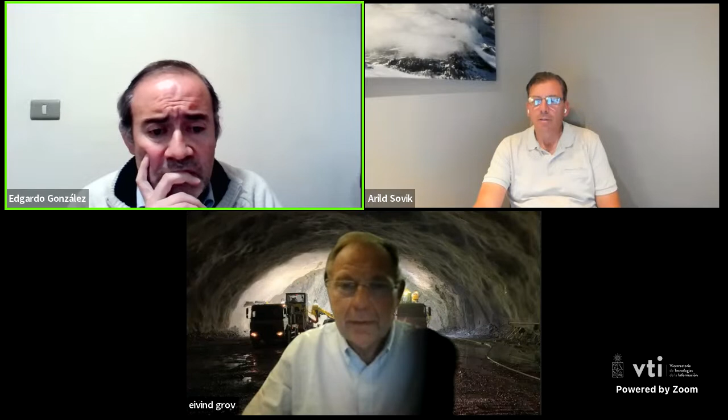How much time do we have? One hour. Okay, 45 minutes to an hour. Then maybe people will have questions and you can respond, you can answer. Okay. I think I have something like 45 slides, and that is probably a little bit too much for one hour.

First of all, I'll introduce you to two bodies that we have in Norway with respect to promoting tunneling, both domestically and internationally. First, we have the Norwegian Tunneling Network, which this presentation is made on the basis of.

It is actually a subsidiary of the Norwegian Tunneling Society, and the reason why we established this network was to engage members interested in international cooperation. We cover the entire value chain of tunnel construction and operation, including design and different types of services.

We have consultants on board, manufacturers, contractors, academia. So the entire value chain.

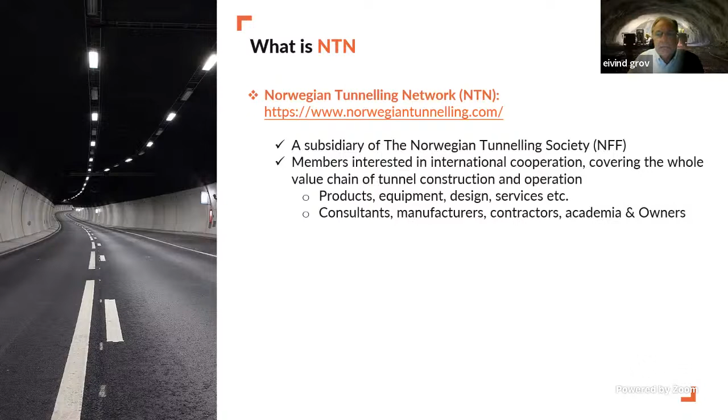The Norwegian Tunneling Society, on the other hand, is a much older organization. It was founded in 1963 and was one of those who took the initiative to establish the International Tunneling and Underground Space Association, under the short name ITA. Today it has something like 1,100 personal members and approximately 100 member organizations.

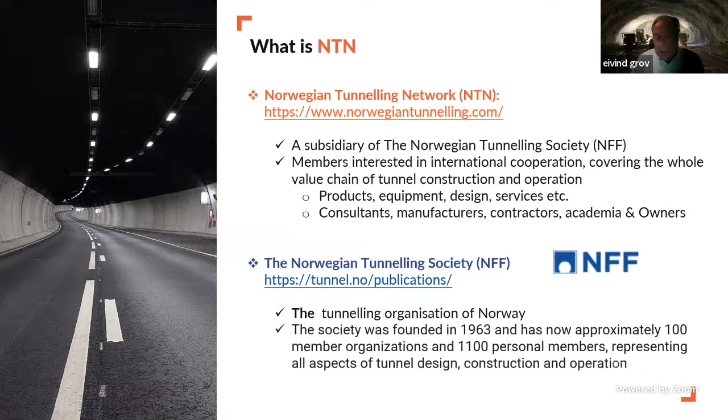This is more an organization established to drive tunneling technology forward and to distribute competence and knowledge within the organization, and also to take care of how the greater society looks at the tunneling industry.

Just a short update on the productivity of the tunneling industry in Norway. In 2022, the total output was something like 5.1 million cubic meters of solid rock. This is equivalent to approximately 68 kilometers of tunnel.

Out of this, about 3.2 kilometers was actually bored with TBM. The rest is conventional drill and blast, which is today even the most dominating excavation method in Norway. A total of 24 different contractors were employed in civil tunneling. Mining, whether above or underground, is not included in these statistics.

From the 80s and 90s, where the output was approximately 4 million in average, we had some big peaks back in 2016-17, where we reached almost 8 million cubic meters of solid rock for civil tunneling. Today we are back almost to what it used to be, but still slightly above the average.

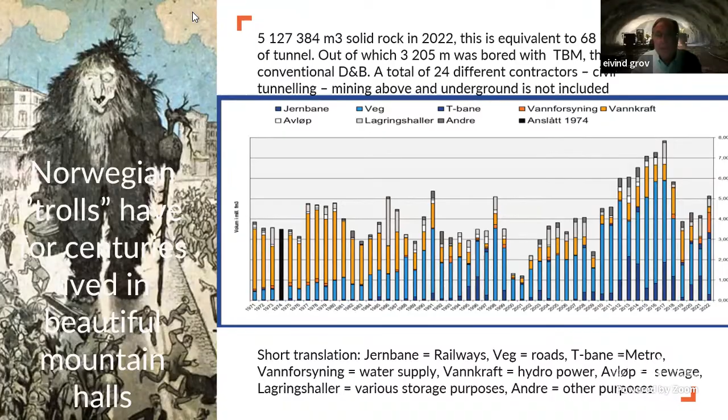Since 1884, something like almost 1,250 road tunnels have been built. We have approximately 150 being planned, and around 50 under construction at the moment. Soon we will have something like 40 subsea road tunnels in operation.

As you know, and as you will see on some maps later on, the Norwegian landmass is cut by deep fjords, which cut deep into the landscape, and this creates the need for subsea road tunnels. A big project named Rogfast, a 27-kilometer subsea road tunnel with 2 tubes, reaching down to approximately 390 meters below sea level, is actually ongoing in the construction phase.

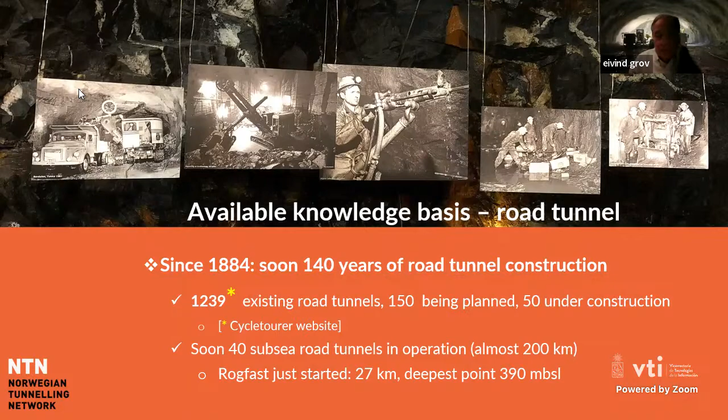When it comes to railway tunnels, the first big project was actually the Oslo-Bergen Railway, which was finished in 1909, and it consists of 182 tunnels, some short and some longer. But at that time, that was a really high achievement for the industry.

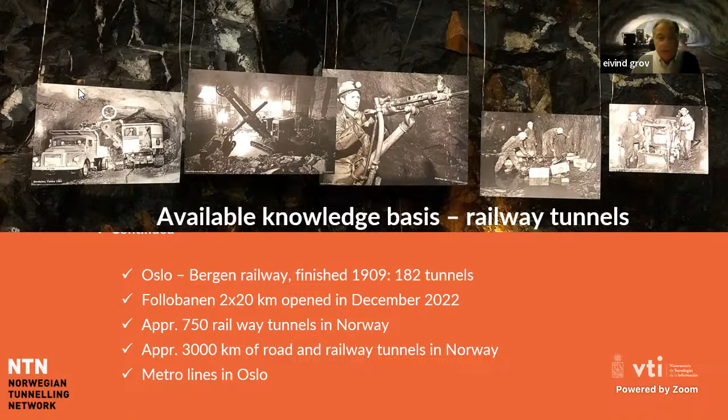The Follobanen, the latest big project within railway tunnels, was opened in December 2022, which is 2 times 20 kilometers of TBM-bored tunnels. We have something like 750 railway tunnels in Norway today in operation. Totally, when you add railway tunnels to road tunnels, the approximate length is around 3,000 kilometers. In addition, particularly in the Oslo area, we have some metro tunnels, but not that many.

If you look at caverns and tunnels in general, the hydropower era started in Norway following the Second World War. Today we have, as a guesstimate, around 5,000 kilometers of hydropower tunnels. More than 200 powerhouse caverns have been built to serve these hydropower plants.

If we look at oil and gas storage facilities, we have around 60 caverns particularly designed and made for storage of oil and gas. The number of caverns for water storage, sewage treatment, parking lots, and so on, we do not have an exact number of, but there's a big bunch of that kind of purpose.

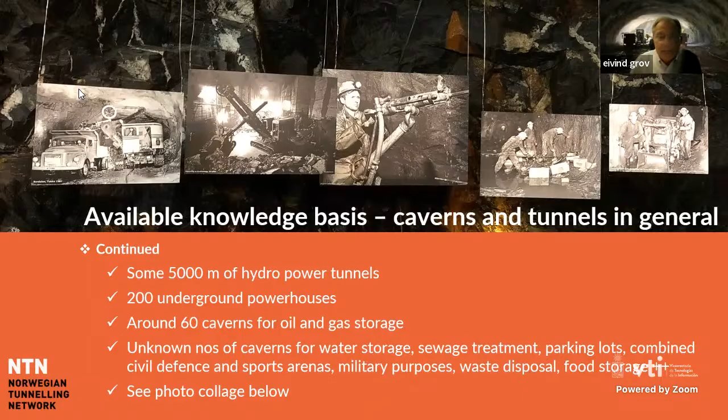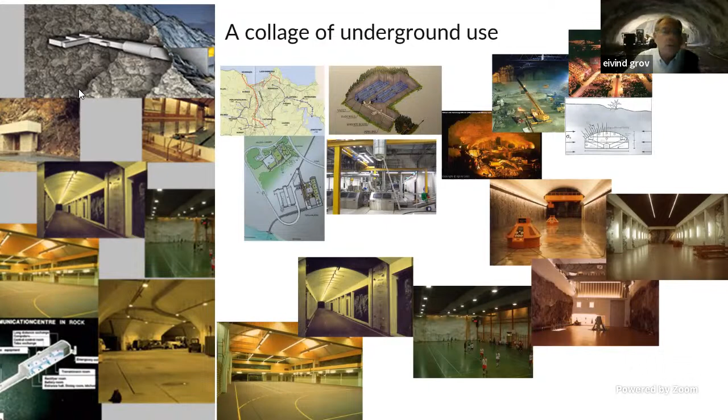I have added a photo collage below where you see some of the uses that caverns are made for. In the Cold War era, in particular, we made combined civil shelters with sports arenas, some of which you see on the left-hand side of the slide. In the middle, you see a map of Trondheim, where there are 2 large storage facilities of drinkable water. On the upper right-hand side, you see slides showing the construction of Gjøvik, and Gjøvik in operation mode, fully packed with some kind of entertainment event going on.

On the right-hand lower corner, you see some interior views of hydropower plants. In the middle lower part, you also see some combination of civil defense shelters and sports arenas. There's a good number of underground facilities for all these kinds of purposes.

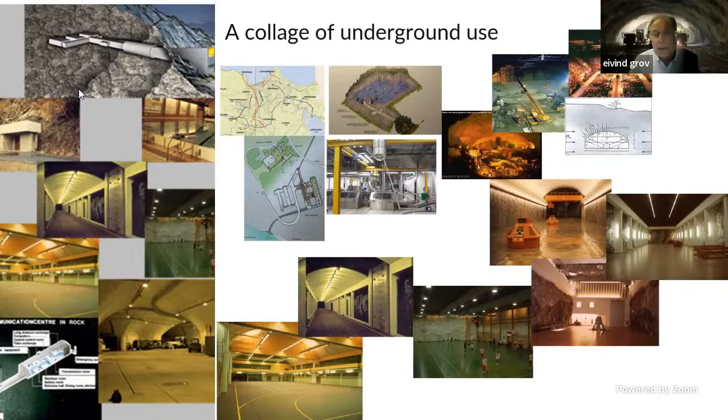The principle in all of these different tunnels and underground caverns is that the concept targets short construction time, low construction cost, and low cost of operation and maintenance. In particular, we consider the rock mass as a construction material, and we integrate this into the underground structure itself. So whatever we need to add to the rock mass in terms of support design or reinforcement, we add what is needed to produce the required factor of safety for that particular tunnel or underground space purpose.

Conflict reduction and efficiency is supported by a risk-sharing contract system and contractor incentives. We will come back to that later on.

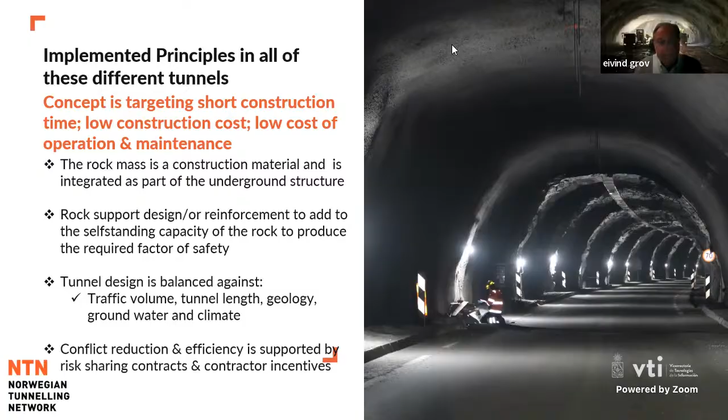We understand that tunneling in Chile is promising at the moment, both for mining and civil tunneling purposes. So the question then would be, can an approach from abroad be implemented in Chile? The first reaction is that each project, and each underground project in itself, is a unique project - unique in the terms that the ground conditions are different from place to place.

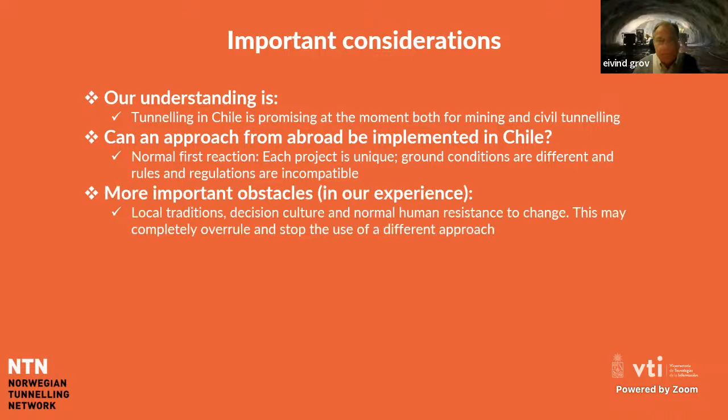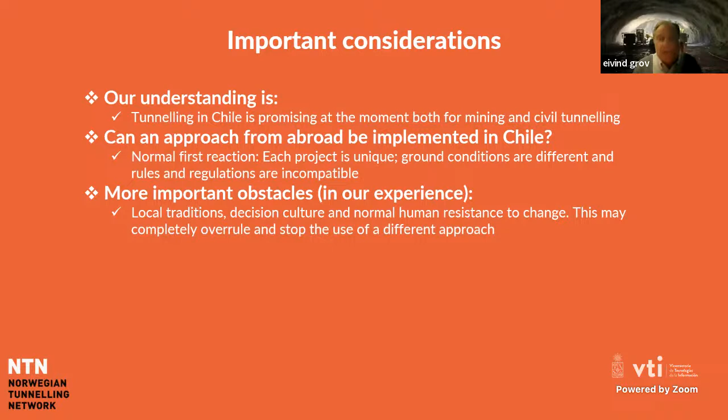And the rules and regulations may not necessarily be compatible. More important obstacles could be, from our experience, that local traditions, decision-taking cultures, and normal human resistance to change could hamper the development. And to some extent, this may completely overrule and stop the use of different approaches. That's a pity if such happens.

Common tunneling challenge everywhere in the world - no matter where we are going, being Chile or Norway or wherever - there is a frequent change of ground conditions within an often very wide range. We have to have a concept, a system which is actually capable of taking care of these frequently changing ground conditions.

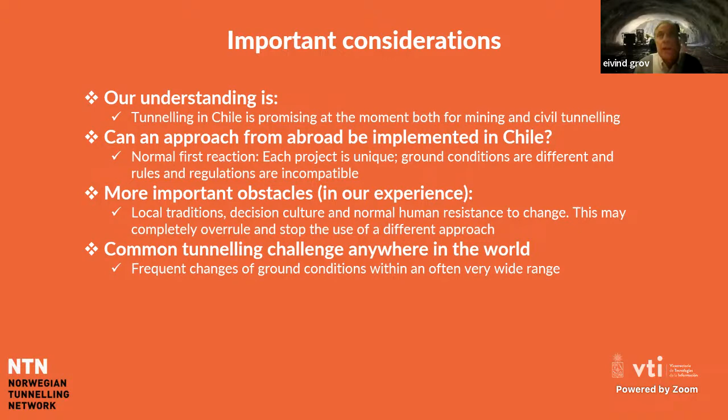So we can challenge this in two ways. We can apply what we consider as a worst case rock support for the entire tunnel - a standard rock support, no matter what kind of ground conditions we have. The other solution would be to adapt the support along the tunnel to whatever is the minimum necessary for safe tunneling and operation conditions. We sometimes call this an active design, because the design is developed as the rock mass is encountered during the excavation work. Both are possible and will work.

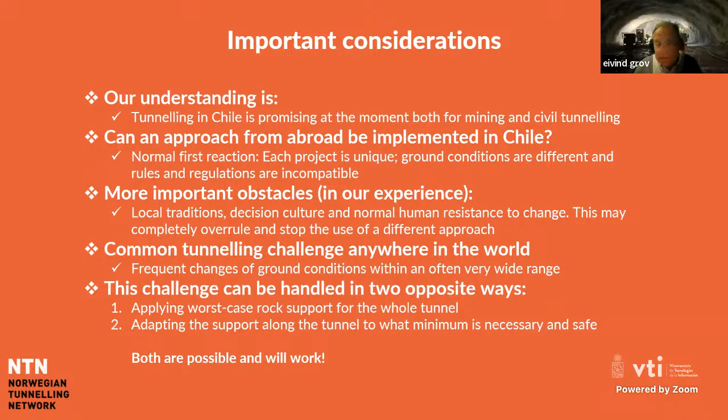However, one may experience that there could be a time and cost difference between these two approaches. We have to take, when we do this adaptive approach, the work changes into account when we implement the support, regardless of rock conditions and groundwater.

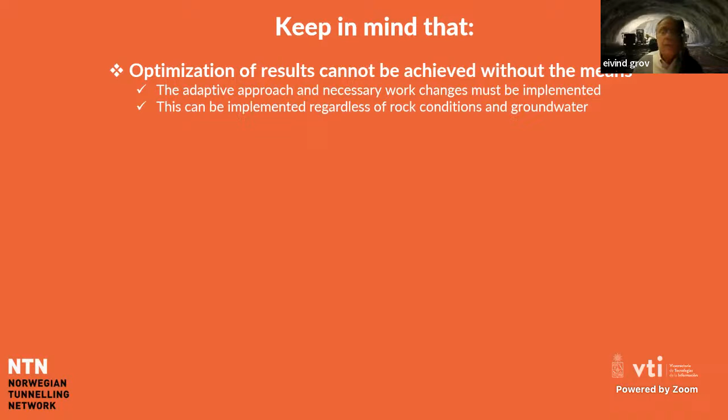What we see internationally is that there is a sort of over-conservative lining solution, which is sometimes applied without actually taking into account what is really required. Honestly, we have seen this growing in Norway as well. But I hope that the new era that is coming, which means we have to reduce emissions from the tunneling industry, will also mean that the solution with cast-in-place concrete linings or precast segments will be reduced in quantity and representation in the tunneling business.

We have seen this being successfully applied in various parts of the world, particularly in the Nordic countries, and I would point specifically to Iceland and the Faroe Islands. But we have also seen this approach being included in tunneling in Hong Kong recently.

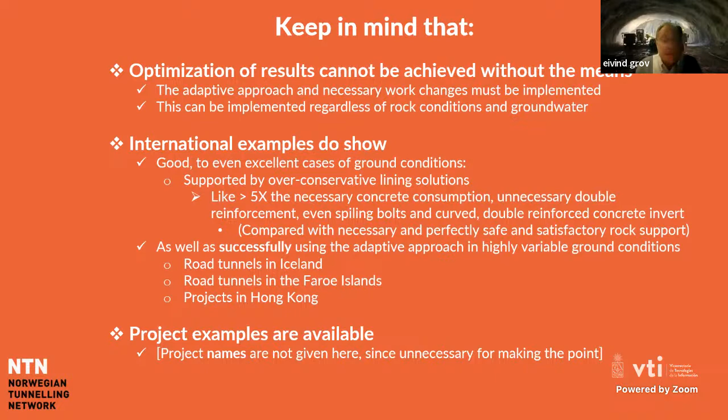Some people tend to believe that the ground condition in Norway is always very good rock mass conditions. That is definitely not the case, because as is necessary in many places around the world, we are also facing the challenge to meet changing ground conditions. The rock burden or rock cover could in many cases reach as much as 1,500 meters, which means we also have to face rock burst and squeezing. But at the same time, destressed areas can also be faced, particularly at shallow depth.

We have had tunnels in Norway with a groundwater head of 1,000 meters, that is 100 bars, which is really something to fight with when you have excessive leakage and you need to grout it by pre-excavation grouting.

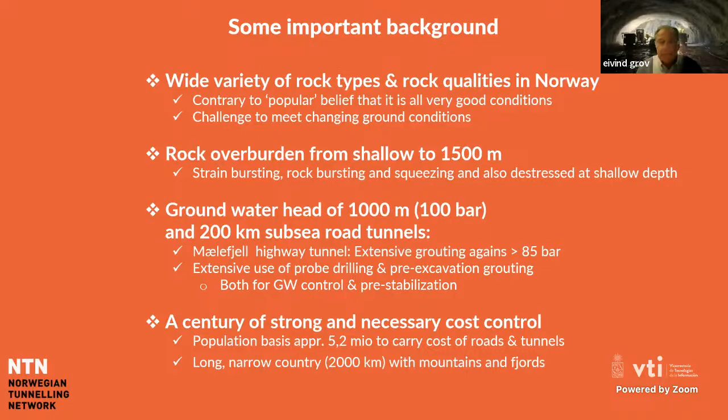If we look at some moon landings in tunneling in Norway, I would say the high performance TBMs that were developed in the 80s, made particularly for hard rock tunneling with up to 32 tons per cutter and 17 to 19 inch cutters, was something developed to satisfy Norwegian owners.

We have headrace tunnels in Norway for hydropower development with more than 1,000 meters water pressure. I think the largest was Nye Tyin, which was put into operation some 10-15 years ago, where the water pressure was slightly above 1,000 - I think it was 1,040 meters.

We have tunnel piercing, which is a kind of specialty that originally came from hydropower development, but has been used recently also for landfall tunnels in the oil and gas business. And the highest water depth was actually 175 meters for the landfall tunnel for Troll.

We have chilled or cold storage facilities for LPG at down to minus 42 degrees Celsius. We aim at, or the idea now is to try to look at hydrogen, ammonia, CO2, to mention some, where we have to go even further, either in temperature or in pressure.

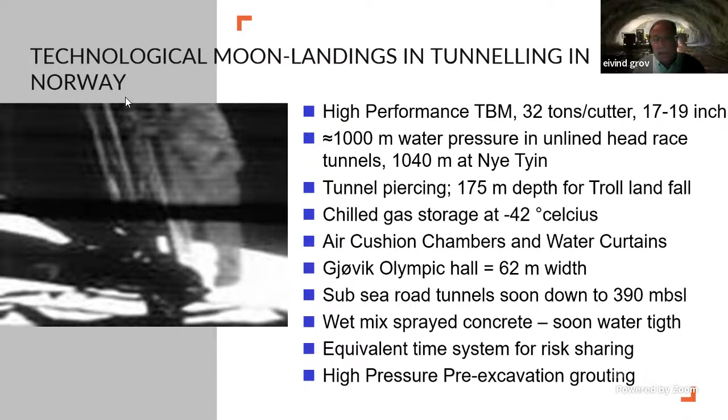As you can see on the pictures, there are lots of reasons in Norway for underground facilities. The coastal line is something like 100,000 kilometers long, with deep fjords cutting into the landscape. We have snow avalanches, rock falls, and a lot of natural things taking place in these fjords.

And going underground, not only because you need it for transport of goods and people, but also due to the fact that in the future there will be more focus on out of sight, out of mind, or not in my backyard. There are lots of surface facilities that successfully can be put underground. And underground, everything is protected from earthquakes, from tsunamis, and from terror and sabotage and unfriendly actions, which we see in the global societies these days.

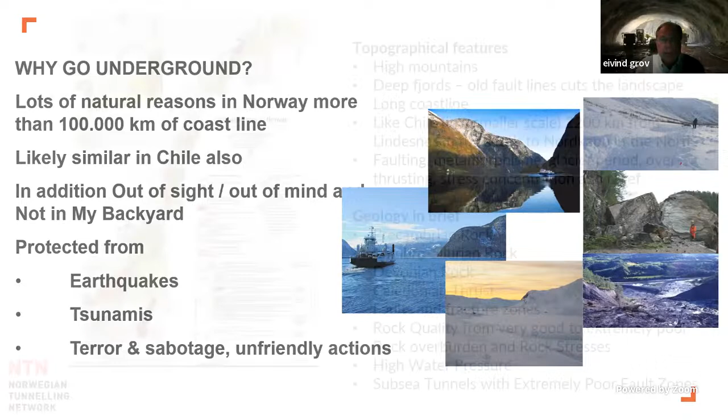If we look at the geological map of Norway, on the left-hand side of the screen, as I said, high mountains, deep fjords, and these fjords are typically fault lines which are cutting the landscape. Long coastline, probably like you have in Chile to some extent, but maybe slightly smaller scale.

This landmass has been subject to faulting, metamorphism, glacier periods, overtrusting, stress concentration, and stress reliefs. So it's a landscape which has not been treated very well by the natural environment it has been a part of. We have Precambrian rocks at the west coast of Norway and in the southern part. We have Cambro-Silurian rock, particularly in the Oslo area. And we have the Caledonian thrust system, which is actually cutting through the landscape from the west coast up through Trøndelag, Nordland, and to the far north.

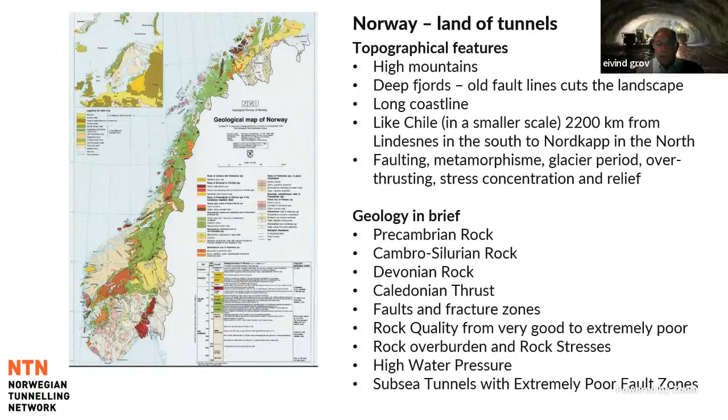So the main philosophy in Norwegian tunneling is, as I said, that rock is a part of the construction material. We have a very systematic approach using, to some extent, risk and opportunity assessment. The fact that we are able, in the tunneling industry, to identify the challenges and risks that we foresee when tunneling a certain section is important. It's important because then we can do the measures needed upfront to reduce the risk, instead of just dumping right into it.

Over the last years, life cycle cost assessment has become a method that is used, particularly when we look at different solutions for water and frost protection, for example, but also on the major part of installations in railway and road tunnels.

With what we see, the UN goals, there has to be a cut or reduction in the CO2 emission from the tunneling industry. And by putting the environmental effects in focus, for good and for bad, that would need to be a source to promote innovation in the tunneling industry. The supercon, which I mentioned earlier, the watertight sprayed concrete, is one of the things we are looking at to be able to reduce emissions and be a better caretaker of the environmental impacts that tunneling is actually causing.

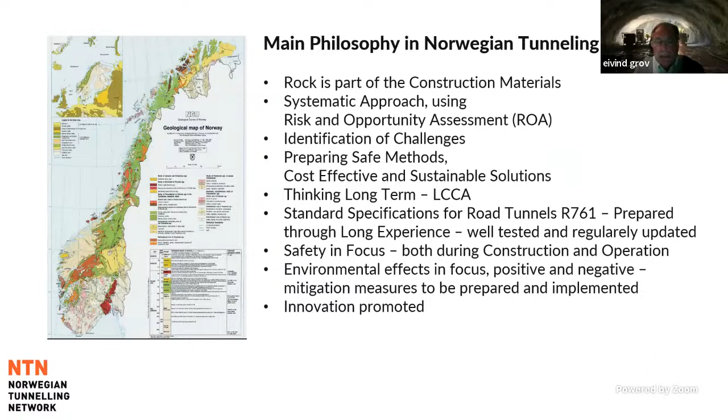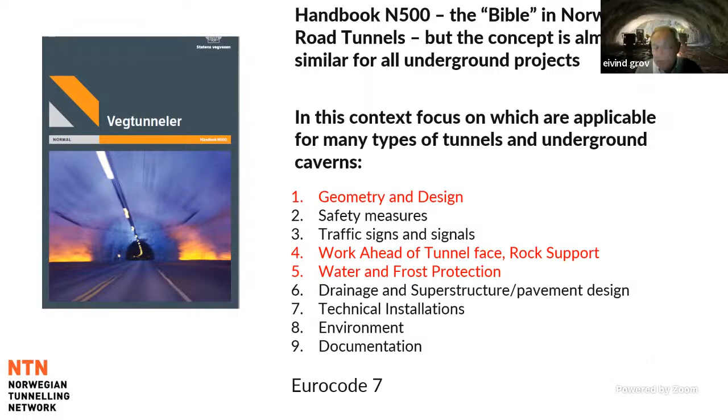During the planning stage, in Norway at least, and I would guess this is not very particular for Norway, we always start with a desktop study for a project, collecting available existing information from neighboring tunnels and caverns or other projects we've been involved in, and so on.

A geological surface mapping is always mandatory, coupled with aerial photos, because in the Norwegian landscape, eroded by glaciers, we can easily see structures because weakness zones have been eroded whilst fresh rock stands up. So it's quite easy to see where we have fault zones and weakness zones.

It follows with site investigation and sampling. In many cases, stress measurements are vital information sought to be able to put the cavern or tunnel in the right place and secure it for stress regimes. But it's also a guideline for how we could actually execute pre-excavation grouting.

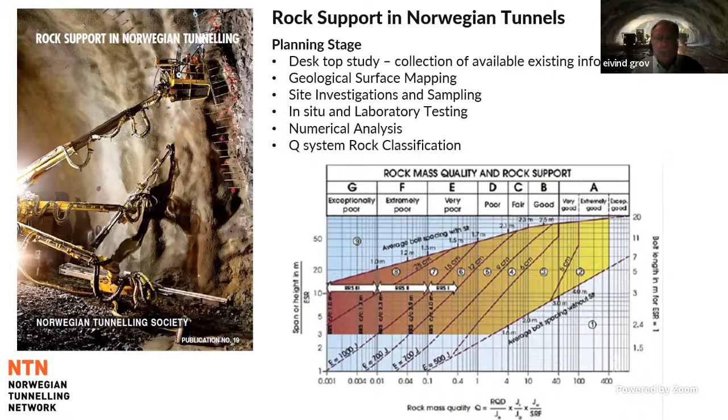In Norway, three-dimensional BIM has become more and more a must in tunneling works. We can take the investigation and test results and implement those into the three-dimensional model, and we'll be able to see orientation of weakness zones, dip of weakness zones, and so on, and model our tunnel accordingly if we have the flexibility. That's important.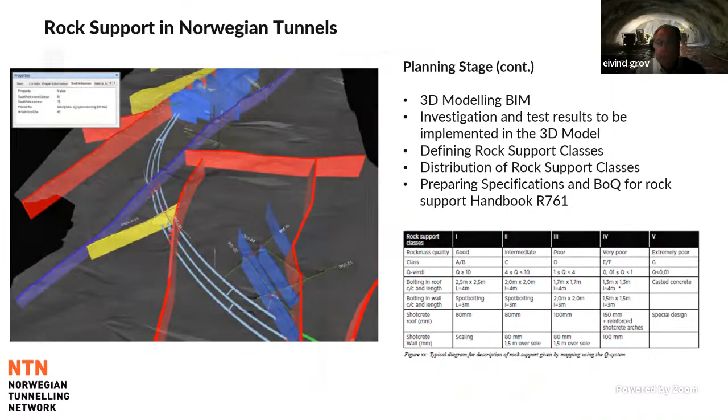When it comes to the construction site, during the planning stage we cannot pre-investigate to such a level that there is no more risk left. That's not a viable situation - it would be too costly, too lengthy, and you may not have full benefit of all this information at the end of the day. Thus there must be some risk we can handle during construction, and some of the means and methods available for that is probe drilling ahead of the tunnel face.

We can do it with the equipment at the tunnel boring machine itself, or as core drilling, but that's a little too long-lasting compared to the capacity you can use from the drilling rig. Mandatory in some Norwegian tunnels today is to use measurement while drilling, so all holes drilled - blast holes, core holes, probe drilling holes - are measured with measurement while drilling equipment.

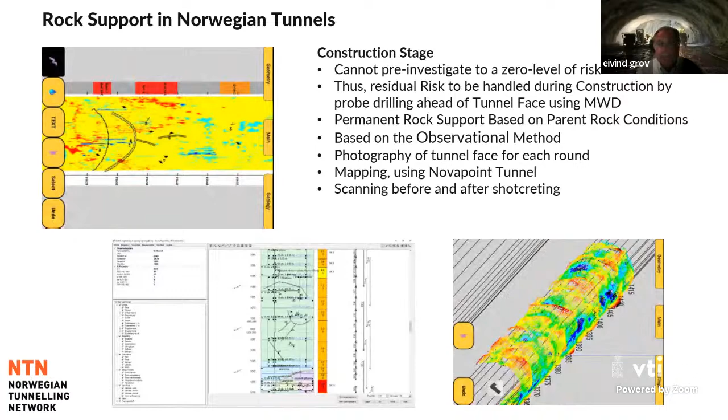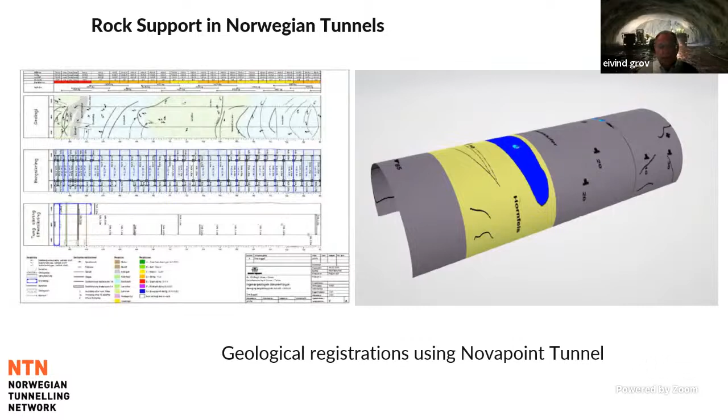One of the main tools that we have is probe drilling ahead of the tunnel face to obtain information of the rock mass ahead of the face, using measurement while drilling technology. But we have also seen new technologies like TPS, rock mass tomography, acoustic sounding, and similar measures, which are useful when we expect extreme poor ground conditions ahead of the face.

Grouting, or pre-excavation grouting, is a must in Norway. We always have pre-excavation grouting as the first line of defense when it comes to dealing with water. And if we need something more than what we could gain from rock bolts and sprayed concrete, spiling bolts will be the first to come, then reinforced ribs of sprayed concrete, and pipe umbrellas if there are extreme poor ground conditions. We try as best as we can to avoid cast-in-place concrete linings in Norway.

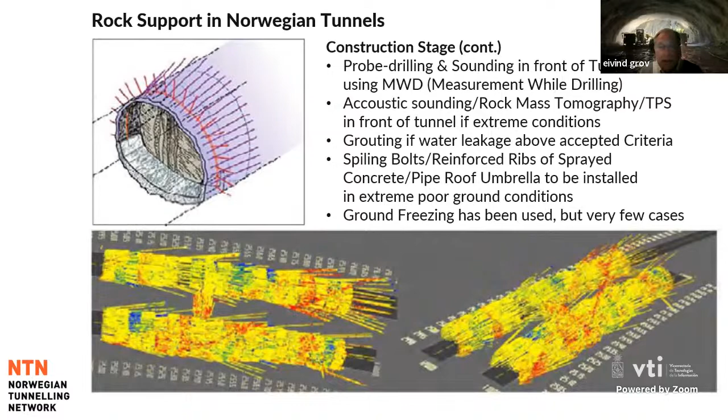It's important that we compare what we gain from the pre-investigation results and the measurement while drilling. It may not be so that they are identical, but I think the most important thing is the precaution and the heads-up on potential zones for decision making, so that we are able to make decisions in good time before we enter into something of poor quality.

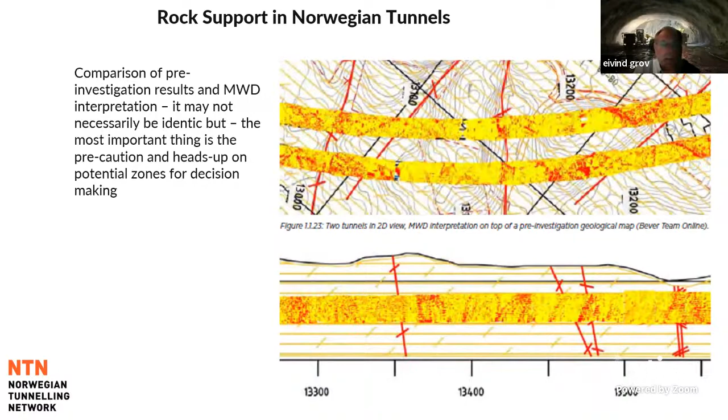On the left-hand side there's a picture of ribs of reinforced sprayed concrete. In the middle, it's a picture of pipe umbrellas, and on the right-hand side you see three pictures on top of each other. This is from the Oslofjord tunnel, a subsea road tunnel excavated back in the late 90s, showing what they encountered going on a descent.

On the upper picture, they came from the left-hand side, went down towards the right-hand side, and you can see they encountered a weakness zone. This weakness zone was actually detected during probe drilling ahead of the tunnel face, and it was of extremely poor quality. So they stopped the excavation and decided to make a bypass on a lower level, which you can see in the picture in the middle.

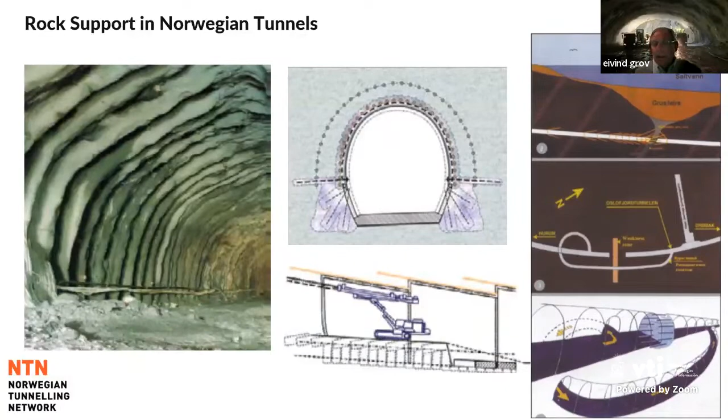They used the freezing technique to stabilize the weak fault zone, and after freezing, they concreted the whole thing. Finally, when this was completed, they opened the tunnel in this area and used the bypass tunnel they had for other purposes. So this was really a textbook example of how to react and what to do when probe drilling ahead of the tunnel face shows something of very poor quality.

As I said, water control in Norwegian tunnels follows the basic philosophy of pre-excavation grouting as the first line of defense. This is due to the fact that in many cases we have experienced water leakage that comes through the rock and enters the tunnel, causing a dewatering of groundwater.

What we have today is a tool to decide the maximum allowable inflow level to a tunnel, based on calculations and modeling of what is on the surface with respect to constructions, or flora and fauna at the surface. How sensitive are these different things with respect to a lowered groundwater level? From this, we get the maximum allowable inflow level in the tunnel, and this level is decisive for the grouting effort we use.

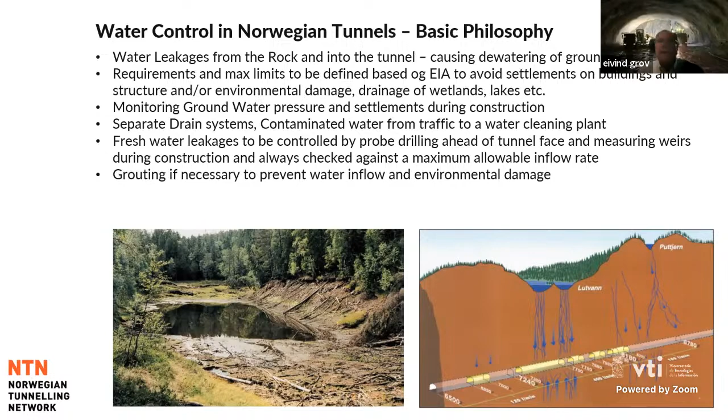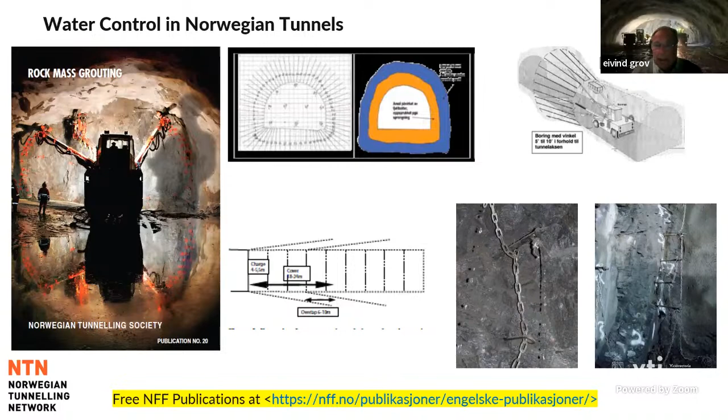The Norwegian Tunneling Society has presented to the International Tunneling Society through ITA a number of publications, and one of them is named Rock Mass Grouting. It holds a good deal of information for the tunneling business with respect to water control by pre-excavation grouting. I don't think I'll go any further into the details on this.

Water and frost protection. In a country like Norway, where we have nice and warm summers, we also have nice and cold winters. In the case of winter, in many tunnels we have to install frost protection systems. Therefore, we call it a water and frost protection system.

In principle, all inflow water that is within the allowable level will be collected through a drain system, between the water and frost protection system and the rock mass itself. It will be drained to the surface, either by gravity or by pumps.

Then we have a number of solutions to actually install these water and frost protection systems. They could be membrane types, PE foam, which is an insulation material that needs to be fire protected, or shotcrete and sprayed membrane. And of course also the heavier stuff, like concrete elements and membrane and concrete lining. But if we concentrate on the first four bullet points, I think that would be a great benefit.

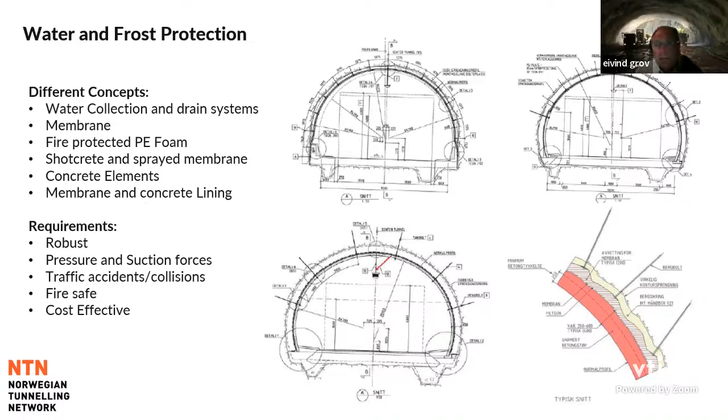So this is a nice picture of a tunnel with a new type of water and frost protection system, which, as you see, does not necessarily need to have a sprayed concrete fire protection system on top.

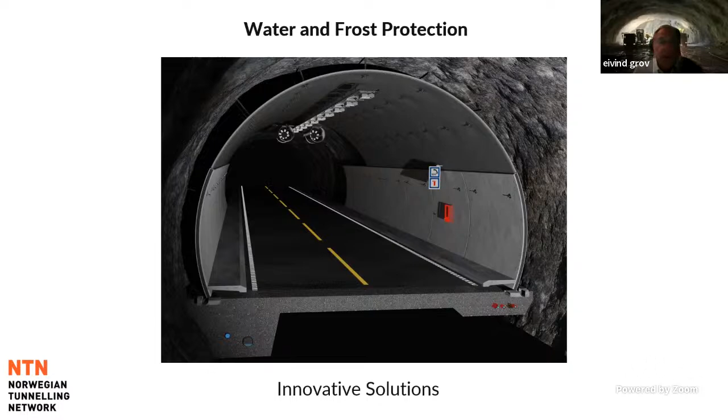So some words about risk sharing. I've said it already a number of times, that tunneling is inevitably associated with handling of uncertainties and risk. The risk is logically associated with geological conditions, and the risk can be significant.

We have seen a number of occasions in Norway and elsewhere around the world on projects which have had cost overruns and time overruns. A number of claims which have gone to court are based on unexpected geological conditions. This is way too often claimed to be the case.

Since each and every underground project is unique - surroundings, geology, owners, and so on and so forth, as we talked about earlier - the risk in each tunnel project is also unique. And therefore, the contracts that we are establishing must be unique and fit for purpose for that particular project which it is designed for.

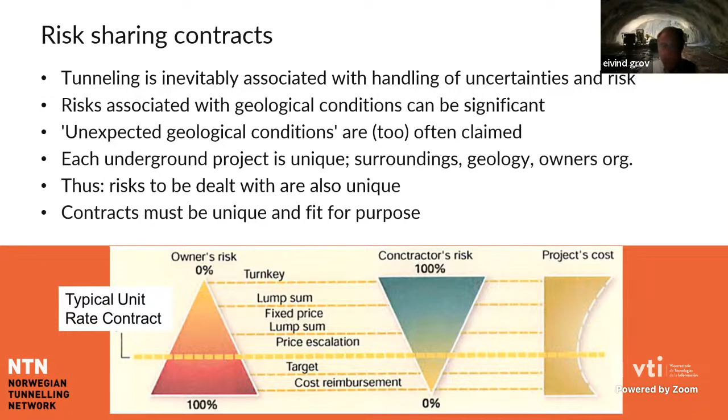When it comes to this risk-sharing principle that we have in Norway, we normally say that the ground conditions belong to the owner's part of the risk picture. The owner is responsible for the ground conditions, the owner provides the ground, and the owner is responsible for site investigation. Consequently, this should belong to his risk portion for the construction of the site also.

On the other hand, the performance is the contractor's risk. The contractor is responsible for efficient execution of the works, executed according to technical specification. In Norway, with this unit rate contract format, the contractor is reimbursed according to tendered unit rates for work actually completed. And then we have a tool at hand to adjust the construction time based on standard capacities and the number of units that are in the contract.

So the contract documents must reflect the best estimate and judgment of the ground conditions at the time the assessment is actually done.

The contract itself is just a mitigation tool, and it has to have relevant regulations so that we are able to deal with the actual situations on site. And we will see that in a few slides.

We have already stated that it's not viable to investigate to such a level that all risk is ruled out. But we are able to reduce the risk to an acceptable level. An acceptable level is also something which is not straightforward, because different persons, different companies may have a different opinion on what is acceptable level.

What the contract has to do is to have a fair and appropriate risk sharing between the owner and the contractor. We have too often seen that the contract documents, when out for tender, may not necessarily give the contractor the possibility to price the risk sufficiently. And way too many contractors jump on this without taking good notice of it. Then, of course, the contractor is in big trouble if things go wrong.

The risk that we have for a project needs to be identified and managed within an acceptable level for all parties in the project.

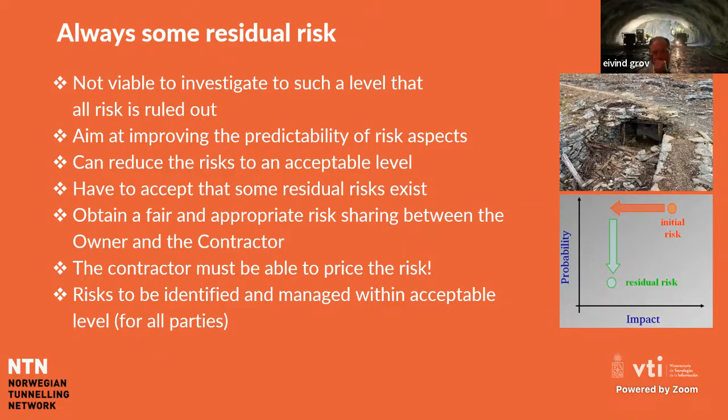As said already many times, we have changed conditions in a tunneling project. That's almost inevitable. But we can differentiate between what is foreseen and expected, what is foreseen and unexpected, and what is totally unforeseen.

When we have a situation which is foreseen and expected, the risk-sharing principle ideally eliminates most discussions about changed ground conditions. Then it only becomes a calculation on the number of items used in the project, the payment, and the construction time that follows. It's kind of a balance sheet for cost and for time.

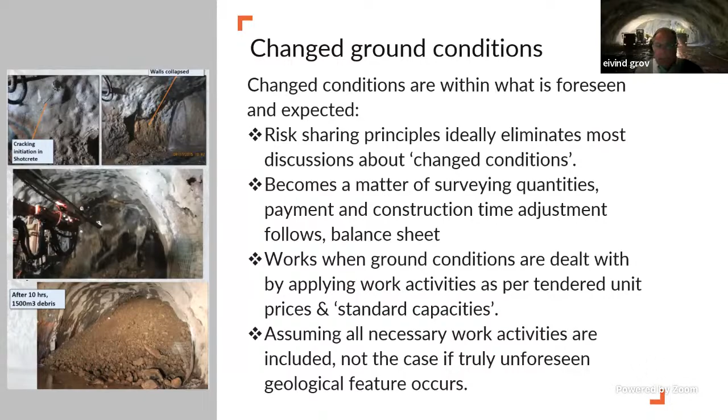If there are foreseen but unexpected conditions, the important thing is that the contract includes contingencies and clauses that could together hold a solution. It may not be as easy as when it's foreseen and expected, but the contract must have conditions and clauses to find a solution for the situation.

On the other hand, if truly unforeseen conditions occur, unit rate contracts may not provide a magical solution, and that will not be done by a fixed price contract either. The success of such a situation depends on the ability and willingness at the site between the contractor and the owner to solve the problem, both technically and contractually and cost-wise.

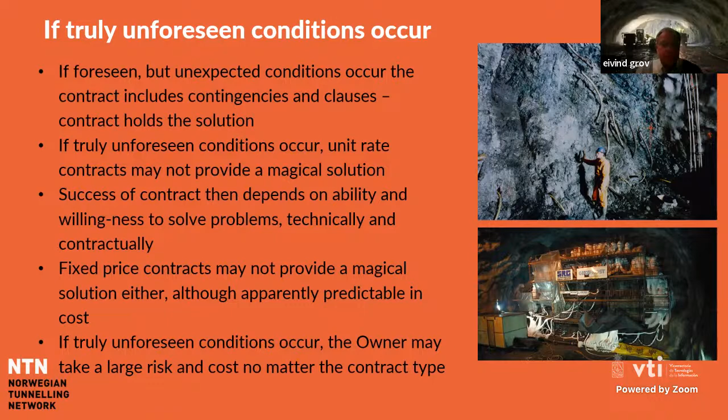In the case of a truly unforeseen situation, the owner sits with the majority of the risk, because it could lead to a bankruptcy of the contractor, and then the owner just has an unfinished product left.

It is important that at the site we have representatives for the owner and for the contractors who have authority to take decisions, decisions which have significant influence on the cost and the time, both technically and contractually. And it's important that we respect each other's tasks.

When it comes to one-time owners, they may have a totally different perspective on risks in tunneling, because they may have one project that they would like to tunnel, and then the situation is different from a multiple tunneling owner.

There is a need that at the tunnel phase, when the contractor and the owner meet and are doing decision taking on rock support, on permanent rock support or reinforcement, on pre-excavation grouting, on additional investigations to be done, and similar things.

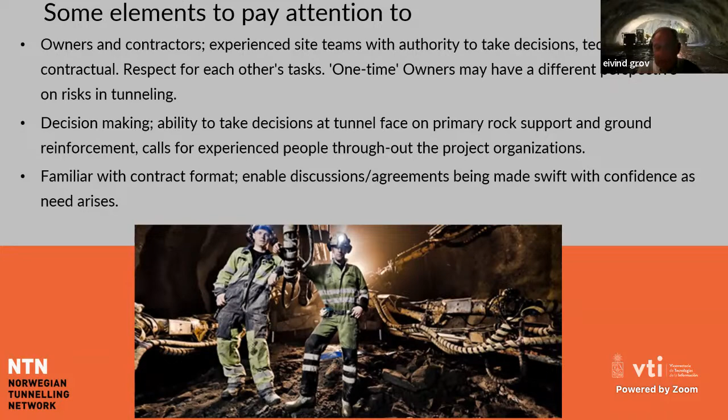The equivalent time principle is something particular. What it actually does is convert quantity, like quantity of rock bolts or sprayed concrete or this or that, into a common unit, which is number of hours. So pieces and cubic and square meters and so on and so forth becomes hours.

Each item for those activities which is actually hampering or delaying the tunnel advance has a standard time estimate for the performance of one unit.

Concrete lining, 0.1 meter per hour, and so on and so forth. These capacities are used in a balance sheet to find the difference between what was in the contract, the numbers or units in the contract, and the actual numbers or units which have been produced. Then there is a difference up or down, and the contractor is entitled to a duration of extension if it goes beyond, let's say, 1 to 2 weeks per year of construction time. So this is a way to use the production to extend or shorten, if that is the case, the construction time.

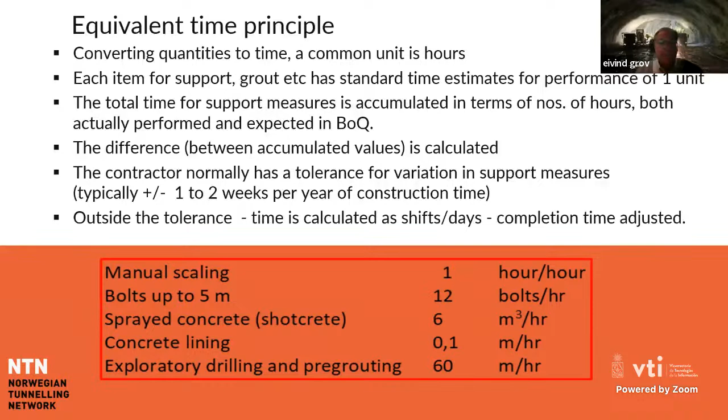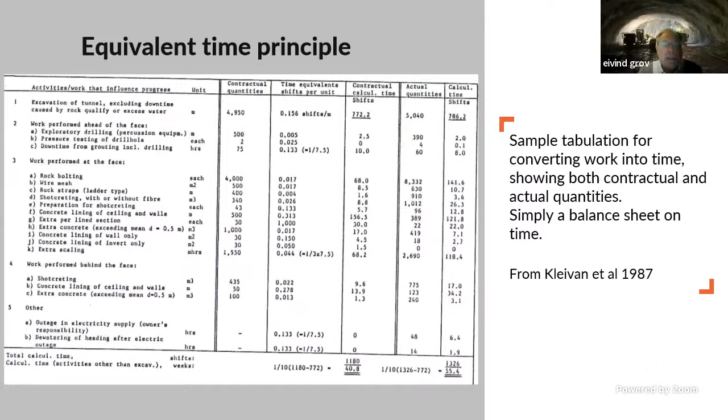This is just a sample tabulation showing how this whole thing is put together. I don't think I need to go through it, but you see all the activities on the left-hand side, the contractual quantities, the time equivalents in shifts per unit. At that time, this was a slightly different build-up: contractual calculated time, actual quantities, calculated time for the actual quantities. It comes to a difference, which is up or down, and it could lead to a time extension or a reduction of construction time, if that is the case.

What we have seen is that in many cases, even a typical straightforward unit rate contract may not necessarily be the best for a project. What we have been looking at for some projects is what we call modified, hybrid, or adjustable fixed price contracts, meaning a certain part of the contract can be a fixed price contract. Typically those items best known by the contractor compared to what an owner could know are the risk taken by the contractor, whilst elements related to typical geological conditions should be the risk of the owners. The Emerald book that came out recently has, to some extent, this kind of hybrid contract format, which is very interesting for the future.

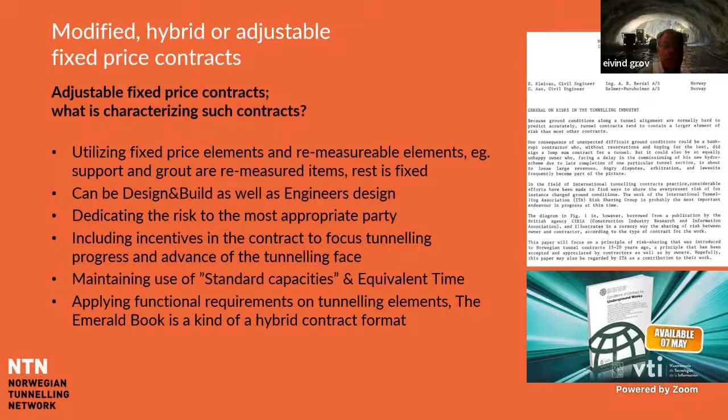When it comes to ground investigations as an important part of our tunneling project, as we have said, you cannot investigate to such a level that all risk is ruled out. There has to be some residual risk. But conducting dedicated investigations means that every single investigation measure shall have its particular purpose, meaning that if you decide to do something, you should strongly defend why you actually have to do this type of investigation at that particular point. Because most of it involves indirect methods, you have to understand the geological features from a tunneling perspective to get some benefit from this information.

As mentioned earlier, probe drilling has been acknowledged as an investigation method in Norwegian tunneling. This means that since we cannot properly do pre-investigation, we leave it to probe drilling ahead of the tunnel face to give us more information while we are doing the tunneling works itself.

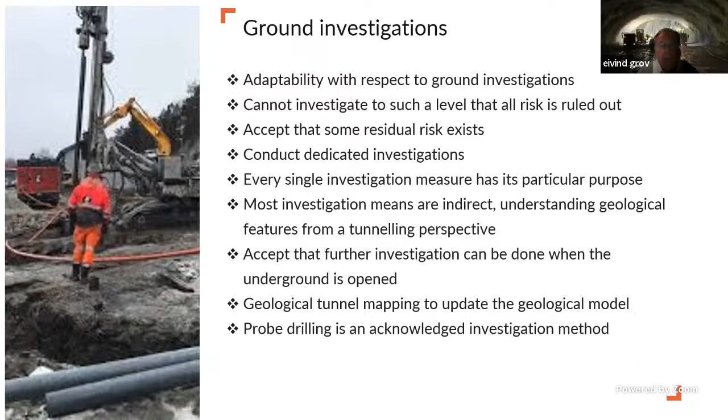Active design, I touched on active or adaptive design at the very beginning of my presentation. It's related first of all to groundwater control. Probe drilling ahead of the face is key, and we are always leaning on pre-excavation grouting. What we have seen is that to some extent we are able to document that we reach down to 2 liters per minute per 100 meter tunnel in residual inflow, which means it is dust dry in fact.

In some cases we are able to improve the permeability by a power of 2, in meters per second. Cautious blasting aims at reducing the cracking, the secondary cracking. To some extent, I think research has not been done properly with respect to the interface between the secondary cracking area, how deep it is, and the consequences on support and on water inflow, for example. There is a lot to gain by cautious blasting to produce a smooth and even surface with as little secondary cracking as possible.

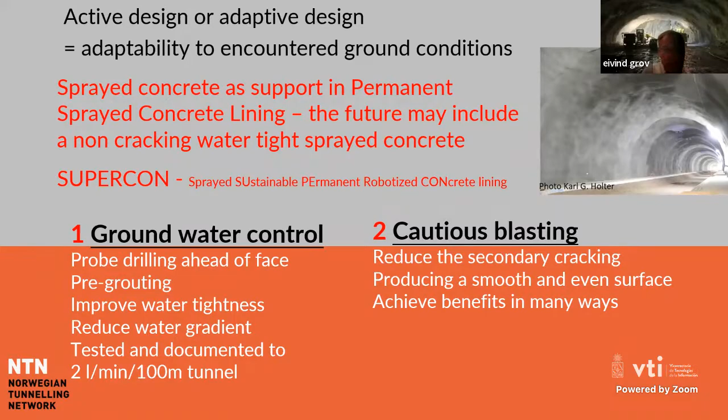We use empirical guidelines combined with analytical and numerical modeling. The Q system and RMR, for example, are typically included in the tunneling design, and when needed we also take into account numerical modeling. I mentioned the tripod earlier — that is a typical example of how we combine different types of investigations.

Observations and monitoring — many believe monitoring belongs to NATM, but over the last years we see that this is becoming more and more important also in hard rock tunneling, so that we monitor what is actually taking place over time and not just look at what was instantly happening when we blasted the tunnel face.

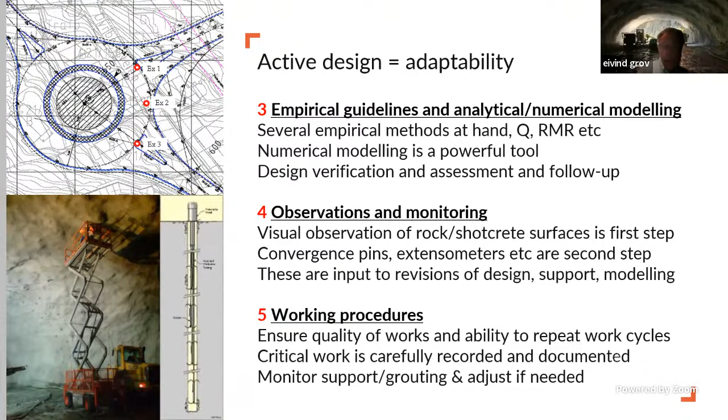One thing to keep in mind is that drain structures mean we do not need to make a watertight tunnel. We have to adapt the water inflow to what is actually on the surface, to the groundwater level, and not disturb the groundwater level, but not necessarily make it a yellow submarine in the rock mass, because that is in many cases not necessary.

Drain structure means that we are also controlling and handling the discharge of water.

Primary support approved as permanent support is something of interest, where there are significant savings, because in some places primary support is done using means and tools that do not fulfill the technical specifications for permanent support, which means you have to ignore what you have done and supplement it with a full permanent support installation. If we use primary support that actually fulfills the technical specifications for permanent works, then we include that into the total permanent support works for the tunnel itself.

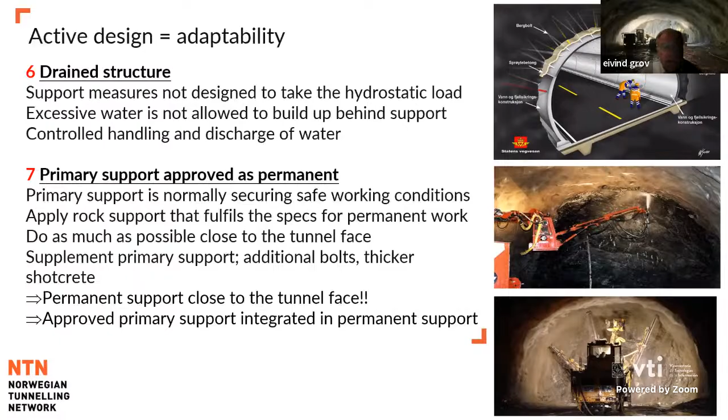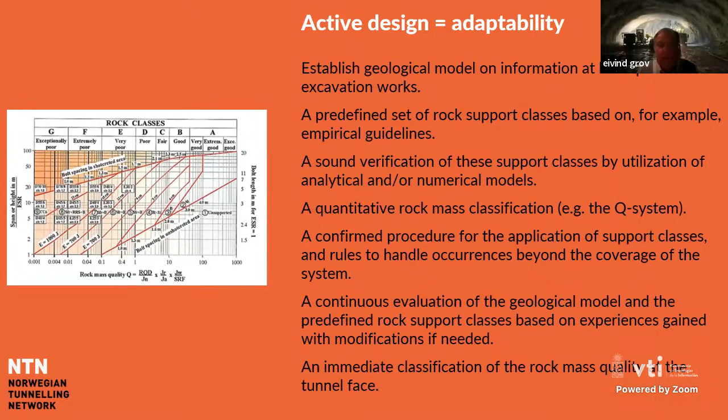These I think we have been touching on already.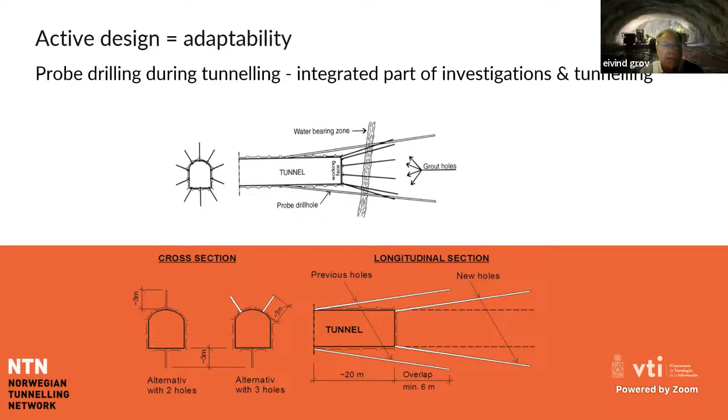In many countries there are lots of people at the tunnel face and maybe old equipment, because labor is cheap and equipment is expensive. In the Scandinavian countries, labor is expensive and equipment is cheap, so we have high capacity, state-of-the-art equipment along the whole line needed, with multi-skilled workmen at the tunnel face enabling high utilization of this equipment, and on-site decision taking.

This is not limited to drill and blast, not by any means. TBM application is also part of the concept, as something like 300 kilometers of TBM tunnels have been constructed in Norway over the years.

We see that more and more data is being recorded, not only for grouting, but for all sorts of activities. From a drilling jumbo, a grouting jumbo, a sprayed concrete jumbo, there is a large amount of information coming out, which could be used in later machine learning and artificial intelligence for the tunneling industry. This is moving slowly in the right direction now.

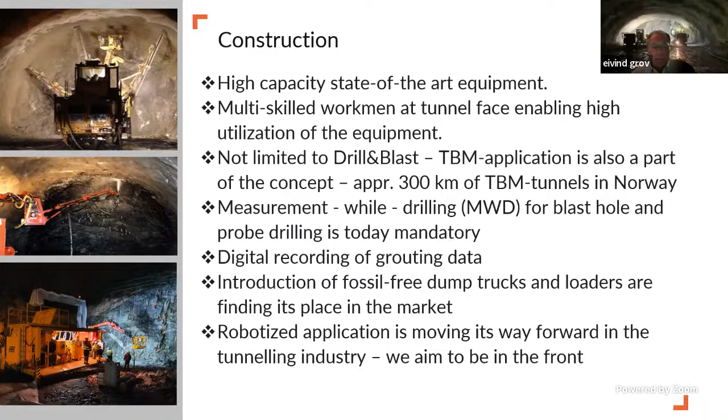In a broad perspective, there are probably more common interests at the construction site than interests of conflict. This is not typically what we see, but I think this is basically the case. We have to respect each other, and respect the different roles we have, since tunneling is a complex process. Constructive cooperation between all the representatives of the involved parties is actually needed at all times in the project. We should be much better at solving conflicts at the construction site by discussing and negotiating, and try to avoid ending up in court.

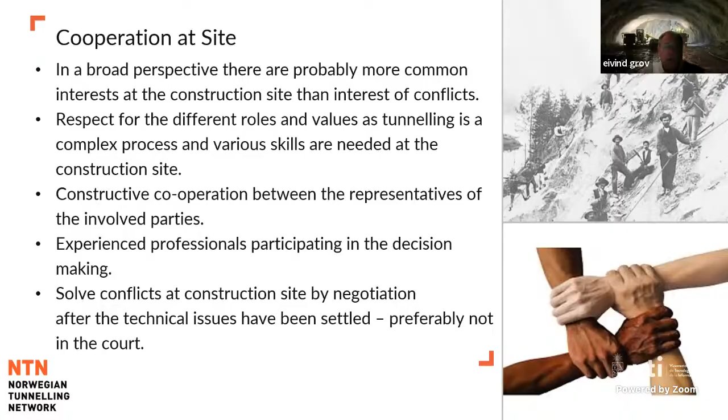So these are the concluding comments. I think the most important bullet point is the one in italic at the very bottom, saying that making decisions by the right persons, at the right place, and at the right time.

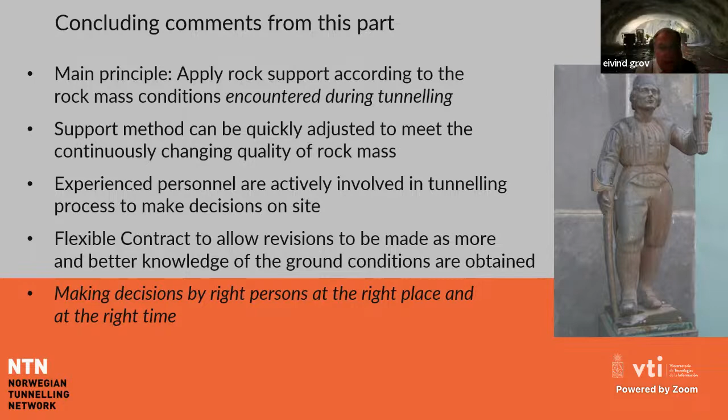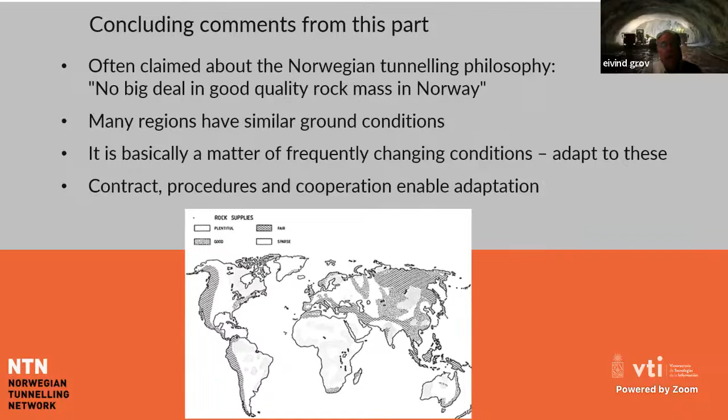It is often claimed that the Norwegian tunneling philosophy is no big deal in Norway because the rock mass quality is so good. But in my opinion, there are a number of regions around the world with similar ground conditions, so this is not typically something only valid for Norway. As I've said earlier, it's basically a matter of frequently changing ground conditions and adapting to this situation - contract, procedures, and cooperation to enable adaptation.